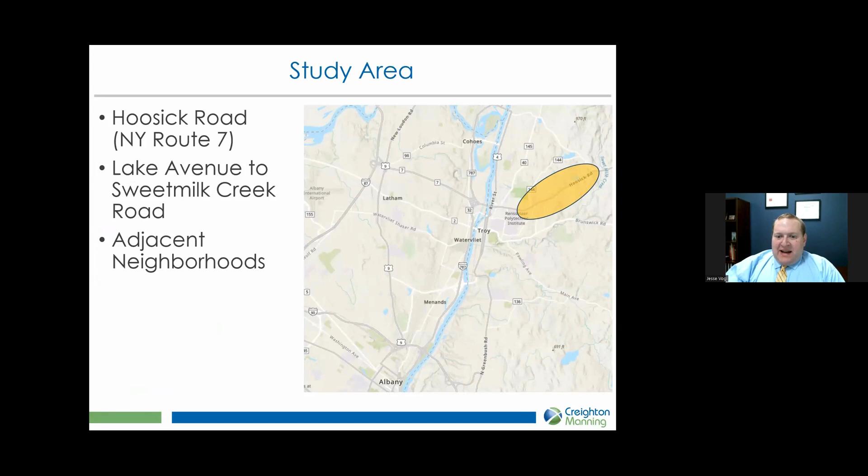Just to give everyone a reminder, this is our study area shown on the right in the yellow circle. It is Hoosick Road in the town of Brunswick. You can see here at the regional level on the east side of the Hudson River, Route 7, which also connects to the Northway. And then here we have a more zoomed in version of the corridor. You can see the blue line representing the Hoosick Road corridor, as well as the 6 traffic signals shown in yellow, and also looking at the adjacent neighborhoods shown within that red boundary.

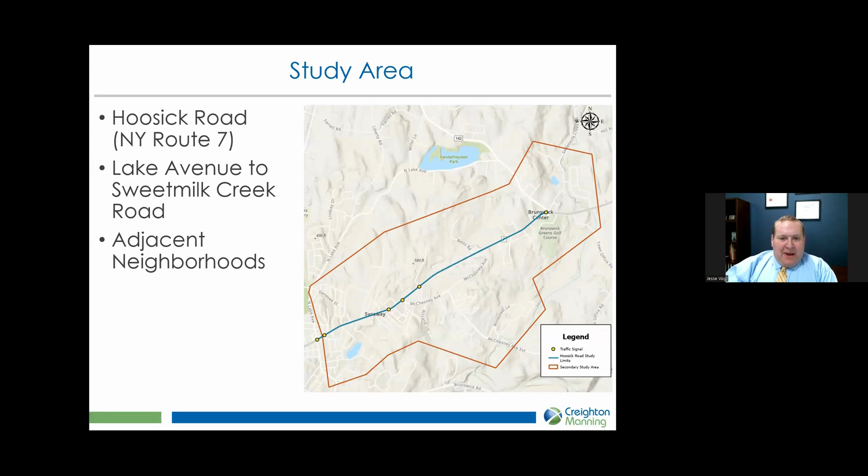Relative to the project, we started in fall of 2022, took a look at existing conditions and also did some forecasting for future needs. We had a first round of public involvement where we received over 1,000 comments, which helped inform some of the draft recommendations. And now we're in this fourth step here where we're looking for your input, and that'll all feed into updating the draft report and issuing a final report later on this year.

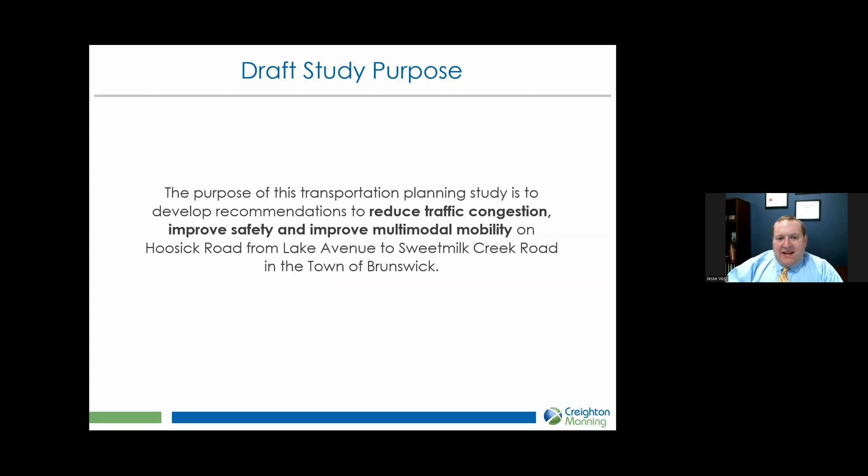Just to remind everyone, here's the draft study purpose shown on the screen. The purpose of this transportation planning study is to develop recommendations to reduce traffic congestion, improve safety, and improve multimodal mobility on Hoosick Road from Lake Avenue to Sweetmilk Creek Road in the town of Brunswick.

We wanted to start by recapping the over 1,000 comments we received during the first online public workshop. Just a quick breakdown of demographics: over 60% of the responses were from town residents, and another 30% were from Troy. So we feel we got a good representation of users of the corridor.

When asked relative to congestion what should be prioritized, respondents identified focusing on mainline Hoosick Road, meaning that they don't like to sit in traffic on Hoosick Road.

We also gave people the opportunity to provide comments on a map. We received over 90 geolocated comments, shown on the right, and you can see that the majority are clustered between Lake Avenue and Lord Avenue, located on the western end of the corridor. Most of these comments were related to congestion or safety concerns.

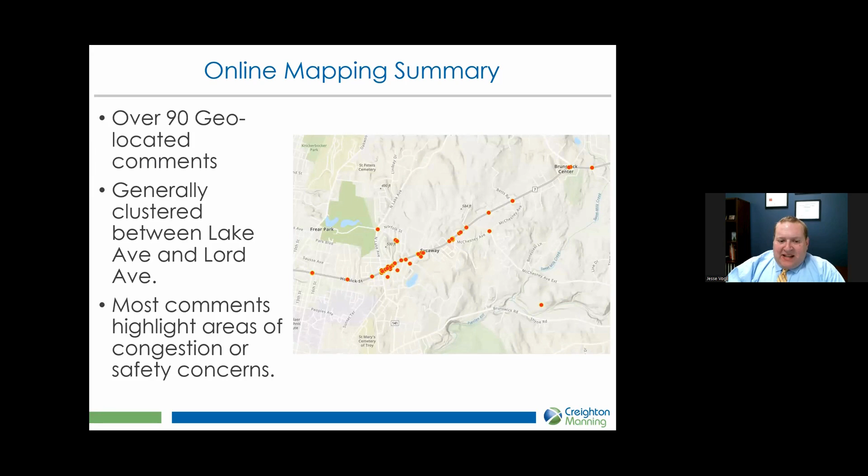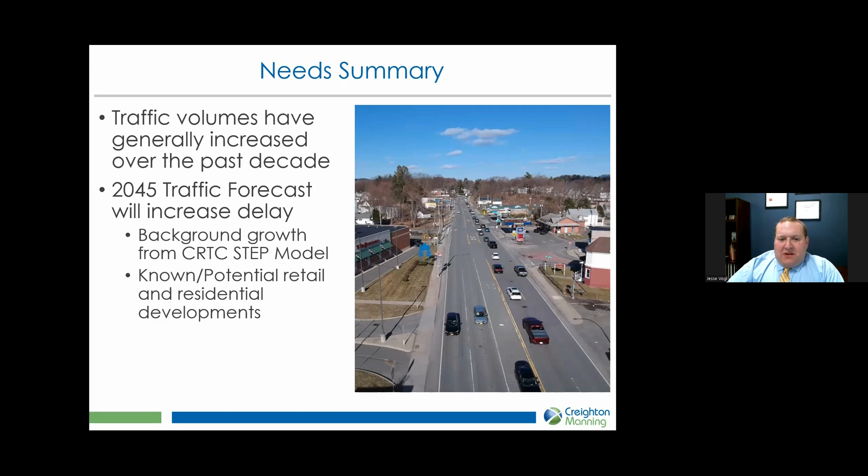All of that together supports the needs summary identified through the existing and future conditions analysis. Just a reminder that in the future needs analysis, we looked at 2045 traffic forecasts, which included both background growth from the regional travel demand model and known retail and residential developments, including the Chick-fil-A on Route 7 currently under consideration.

All of that information helped us develop the improvement concepts categorized here, including roadway widening, intersection spot improvements, traffic signal timing adjustments, transit considerations such as bus stop placement and design, as well as road and path connections, and some access management and land use policy considerations.

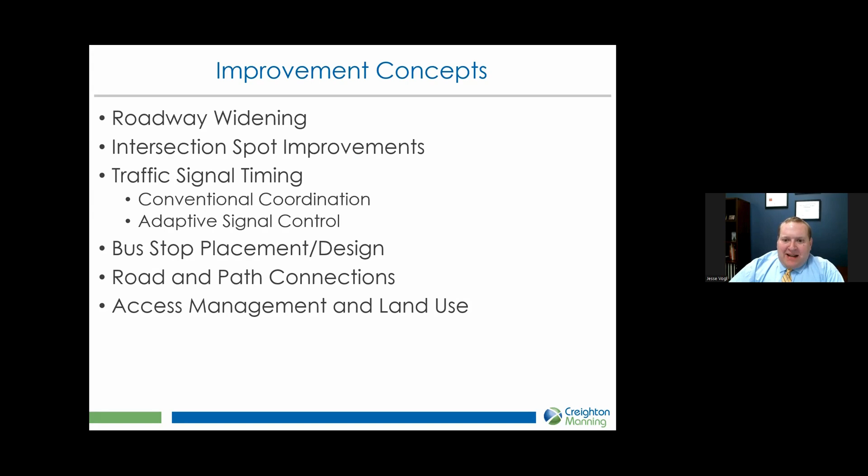Starting with roadway widening, it's important to note that this was previously studied by DOT and found not to be feasible. The previous study identified over 170 property impacts with 27 structures affected. At this time, roadway widening is also not consistent with state DOT or regional funding policy, which has adopted a preservation-first standpoint, meaning roadway maintenance is the priority due to funding limitations.

It's also important to note that roadway widening typically induces travel demand. As the roadway gets widened, capacity increases, which leads to further development further out. That increases the amount of traffic, which then takes up the new capacity, and you're left right back where you started. Therefore, full roadway widening is not recommended at this time.

In addition to the full roadway widening concept, we looked at a reduced widening concept, which we call the 1-1-2. This would maintain a single lane westbound, a center turn lane, and increase to two lanes eastbound to match the existing cross section east of Roosevelt Avenue. This will also include a wide side path on the south side.

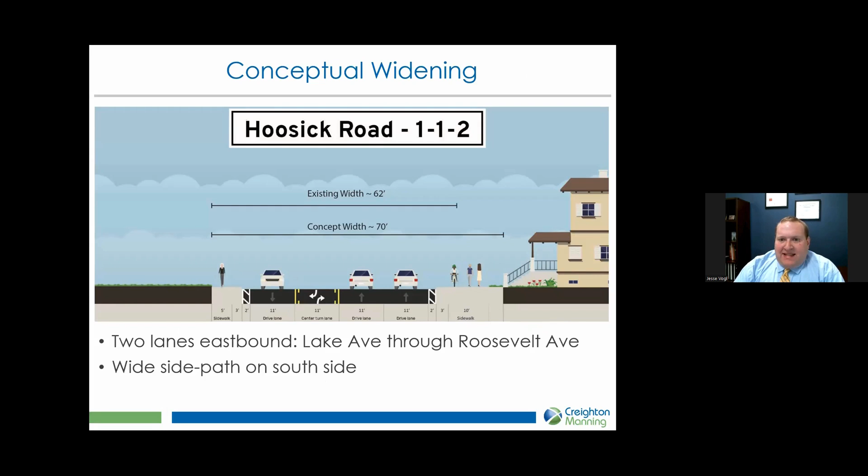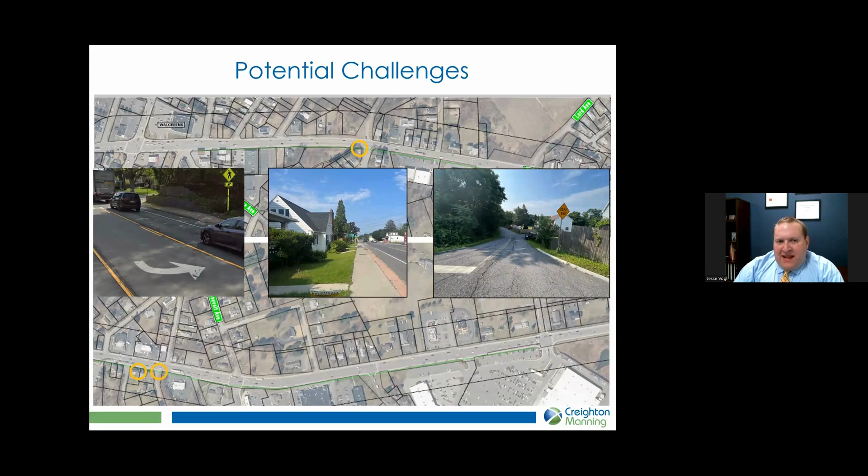This was also found to have some property impacts, which we can see here. One notable impact is a retaining wall that would be affected. Likewise, some houses very close to the roadway would be impacted, as well as grading issues on side streets that would need to be addressed, both here and at Lord Avenue. Due to these challenges, we don't consider roadway widening feasible.

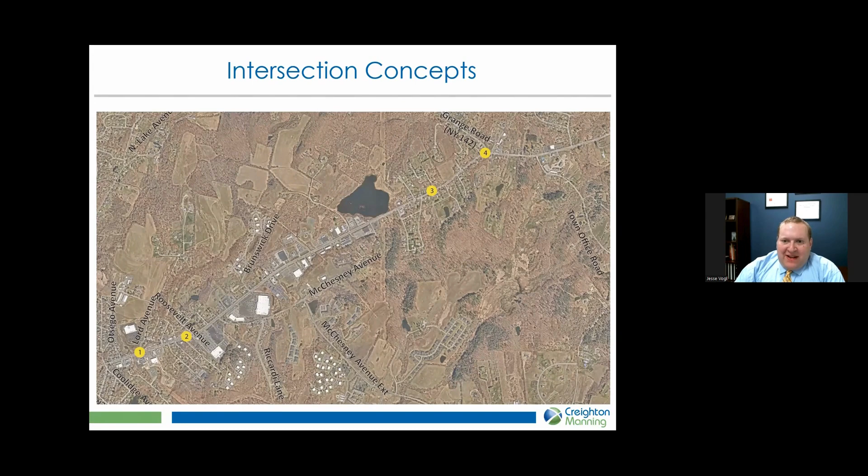At Lord Avenue, one concept we looked at was a roundabout. The traffic analysis shows that a roundabout with 2 lanes on Hoosick Road and a single lane on the side streets would result in a significant decrease in traffic delay. It's important to note this roundabout would have some private property impacts, as shown in the image to the right. It would also include changes to the recently reconstructed Lord Avenue intersection, potential impacts to drainage on the new Hannaford site, as well as the private properties, and therefore would need to be studied further for feasibility.

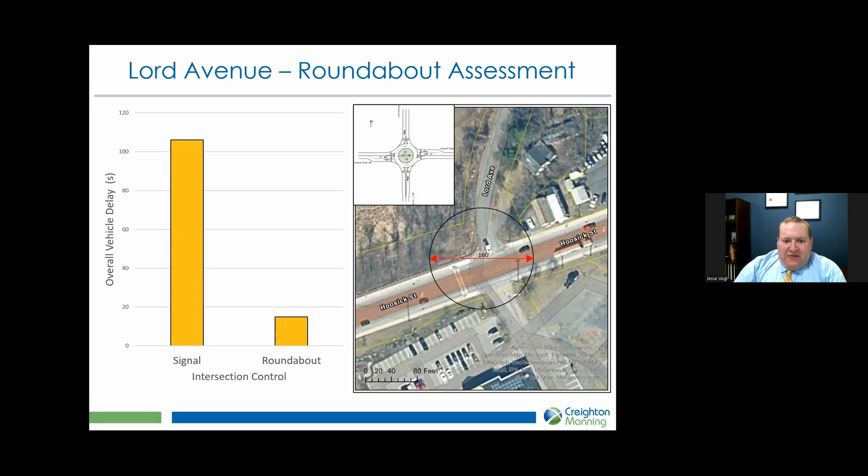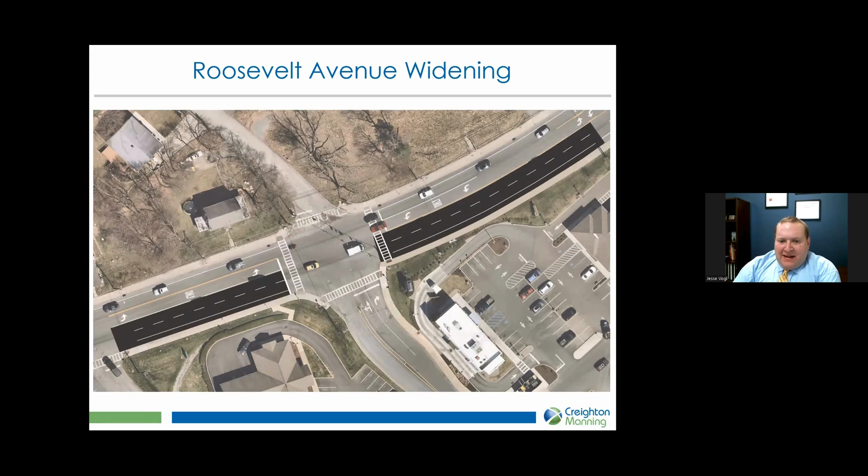Moving east to Roosevelt Avenue, a roadway widening here could be done to increase capacity. Just east of the intersection, Hoosick Road, which starts as a single lane, widens out to 2 lanes. The concept proposes maintaining 2 through lanes through the Roosevelt Avenue intersection eastbound, which would increase capacity there. It's noted that the town has already secured the right-of-way for this improvement, so this is a likely feasible improvement.

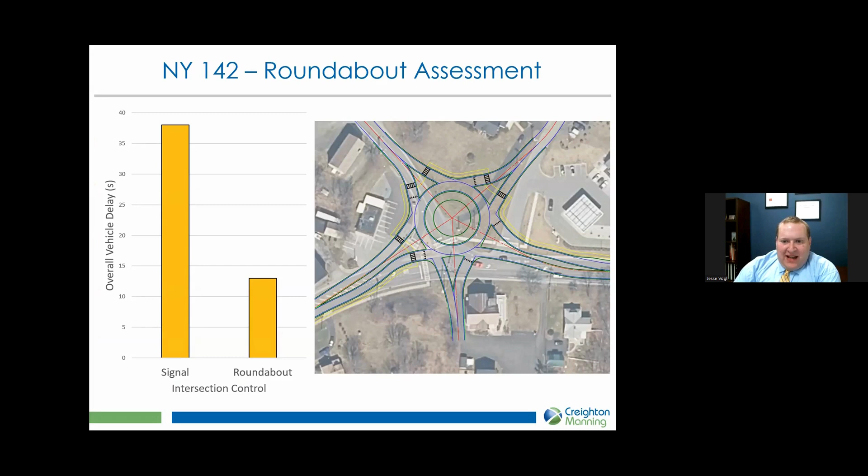Lastly, another roundabout was reviewed at Grange Road, in the vicinity of the Stewart's. The traffic analysis on the left shows that a roundabout would result in about a two-thirds reduction in traffic delay, and a five-leg roundabout could improve access to the church on the south side as well.

In addition to those single intersection improvements, we also looked at traffic signals throughout the corridor for both coordination and adaptive traffic signal control. Traffic signal coordination improves progression through the corridor by having all signals operate off a standardized timed clock that synchronizes when green phases come up to help maintain progression. Alternatively, adaptive traffic signal control includes communications between each signal and a server in order to track traffic in real time through the corridor and adjust signal timing to respond to demand in real time.

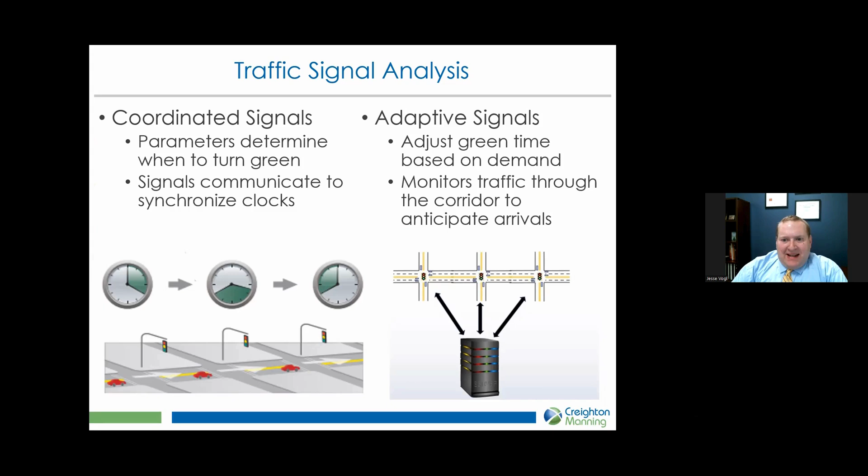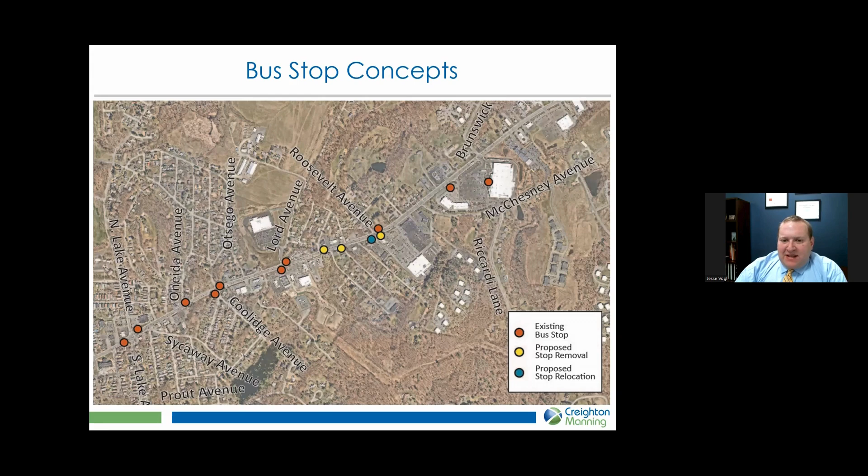One thing we also heard for the Hoosick Road corridor is that buses could potentially be contributing to congestion as they stop in the lane. Here you can see the existing bus stops mapped in the corridor. We're proposing several stop removals at mid-block locations to improve bus stop spacing, as well as one potential stop relocation that would move buses out of the travel lane into a queue jump.